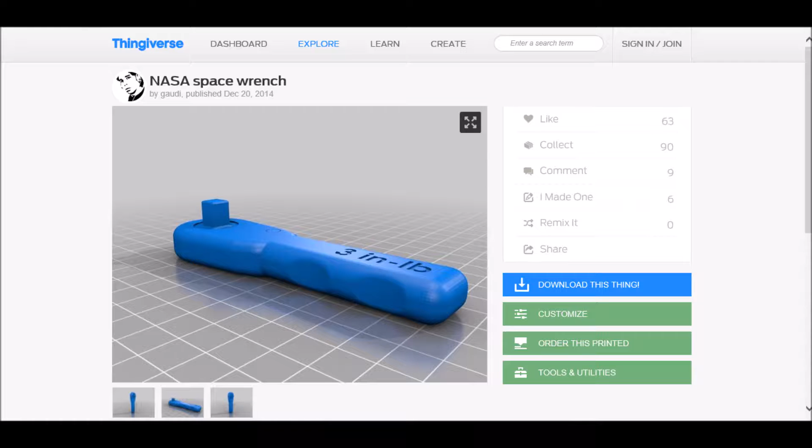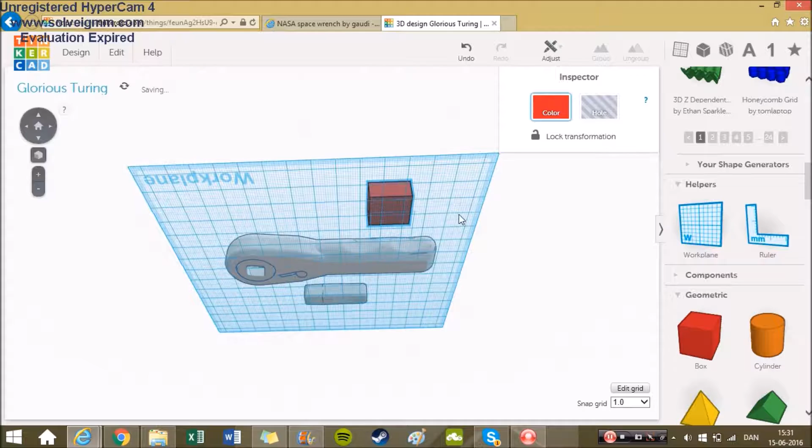Here we are in Tinkercad, and here you can see the wrench—it was ordered as a gift, so the name is on it. You can see it has a hole in the middle where it turns, and then there's this little block that you put in. I'll take a red block, make it half the size, and drag it over, put it down a bit so it fits, then make it into a hole, and group everything together so it slices the wrench in half, and we'll see how it looks.

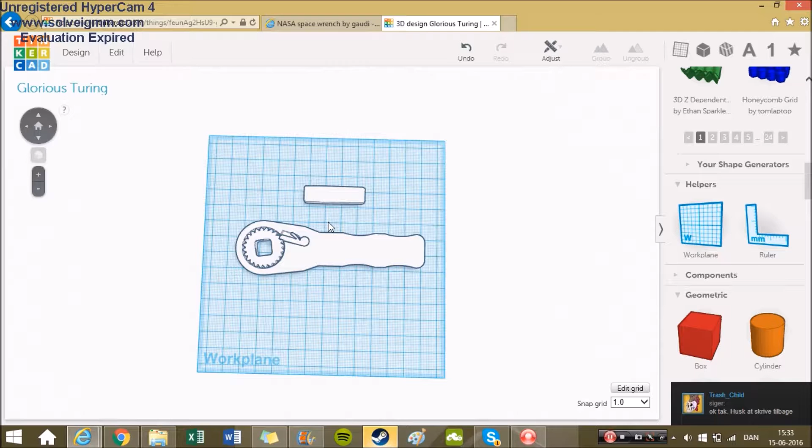Now it's sliced open, and you can see this big gear and this little piece that pushes on the gear. It works because the gear can only turn one way—when it tries to turn the other way, this little spring pushes against it so it can't. You can see there's a little gap between the gear and the wrench, and that means the gear can turn even though it's printed as one part.

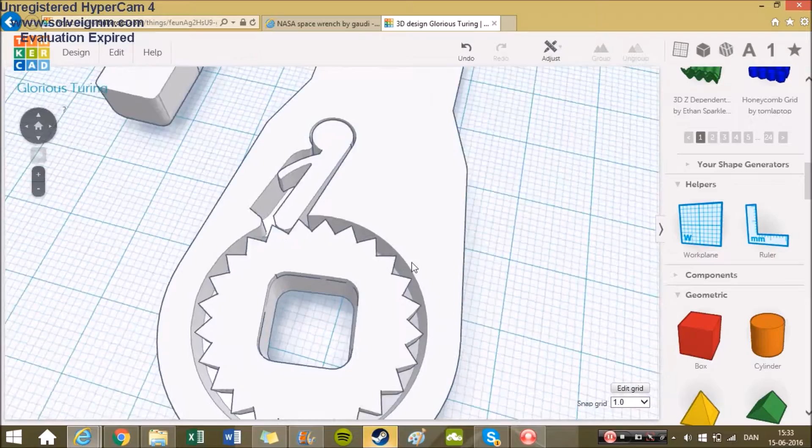You need a really well calibrated printer to print things like this, because if it's just a millimeter off, the two parts will stick together and it won't turn. Here you can see the gear is a bit taller than the little hook, so the gear stays inside the wrench and can't come out. Everything else looks very good, so let's get printing.

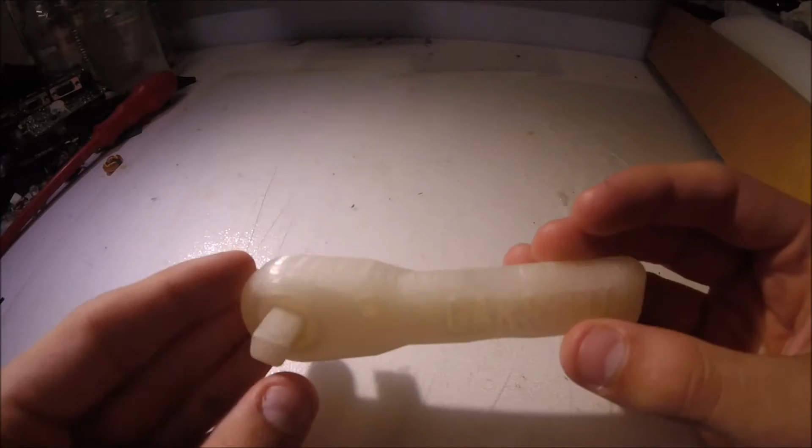Let's see how it looks. Here you can see the final part—you can see the name is standing out really well. To make it work, you need to take it off, wiggle it about, and hit it a few times.

On the desk, and suddenly it will pop free and start working. It's really fine because it's printed with 0.1 millimeter layer height, so there are no defects, and it just works really well. You can see here I tried to test it, and it worked really well—it tightens one way and loosens the other.

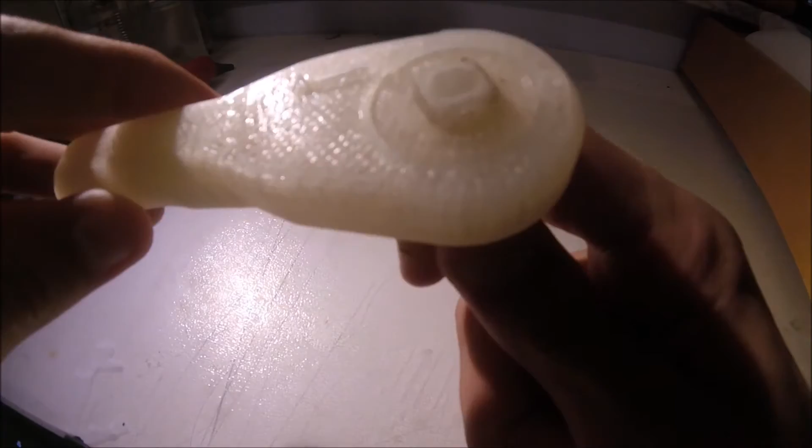If you need to loosen the bolt, you just flip it around. It doesn't work as a real tool because it's made of PLA, so it's really brittle, but it's a good gift and a good thing to put on the table and use as a memory.